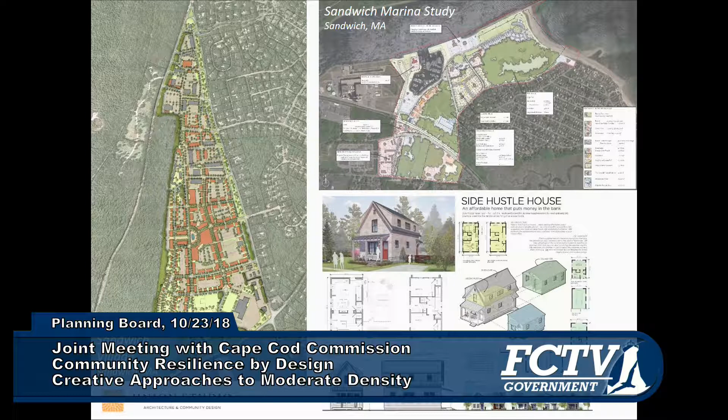Just a couple of examples on the left, South Sandwich Village, a newly proposed mixed-use community we worked on several years ago. Top right, the Sandwich Marina study, working with the town of Sandwich and Mass Development on a vision plan for the marina area. The lower right corner was a competition by the Cape Cod Young Professionals Group to design workforce housing—a little cottage side hustle house we proposed.

We also have a number of built projects or projects in the works on the Cape. Top left, Heritage Sands, a cottage community in Dennisport, Massachusetts. Top right, Brewster's Landing, a 40B project with affordable and market rate housing in Brewster, Massachusetts. And on the bottom, Sea Captain's Row in Hyannis, which will be workforce housing.

So again, we aren't Cape based, but we certainly spend a lot of time out on the Cape and are glad to continue doing so.

As a quick outline for tonight, first I'll recap our first presentation—let me get a show of hands of who was here for that. Okay, that's helpful, so I won't belabor it. I won't redo the first presentation entirely, but I want to recap the major issues so you understand what we were trying to achieve. Tonight is the second presentation, where we're presenting the proposed strategies and results of the efforts we've been doing for the last few months.

I'll talk about the input we got in the first public sessions. We also had an online visual preference survey, which got something like 450 responses, so I'll share that input too. We'll talk through the proposed building types, which is really the core of our deliverable, and then go through a few illustrative case studies showing how those building types could be applied in the various communities we've been working with. We'll conclude with next steps and some time for discussion, though I know you have a full agenda tonight.

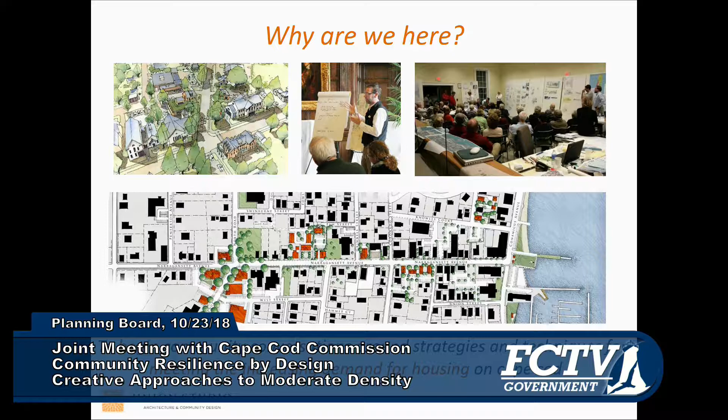So a quick recap of the first public presentation: why are we here? We wanted to start a series of community conversations around the need for addressing the housing crisis on the Cape. In particular, we wanted to make sure we were getting input from the community—we didn't want to show up with our own lens or ideas without talking to the community to figure out appropriate strategies that would actually belong and fit in and enhance the communities we're working within.

In terms of our process and schedule, we began back in May with preliminary work. Our first public presentations were in June. We ended up doing an online visual preference survey in July and August, giving ourselves more time to make it the best survey it could be. We presented at the One Cape Summit in August, sharing our process and preliminary thoughts. And here we are doing the second public presentations—originally planned for September, but here we are in October. We'll also be doing this in Eastham and Orleans in November.

Our last step is developing a framework for form-based regulation. We'll talk about that a little bit later, but that's our next and final step for our process. But we are also looking to expand and do the same exercise in additional communities. Again, we'll talk more about that later as well.

As I mentioned, we're starting with three communities: Falmouth, Eastham, and Orleans. Why those three? Well, those are three communities that have recently gone through studies that identified places where some new moderate density housing types might be appropriate. In fact, two of the three also have undergone recent zoning changes, not Falmouth but the other two, that try to promote more of these moderate density housing typologies.

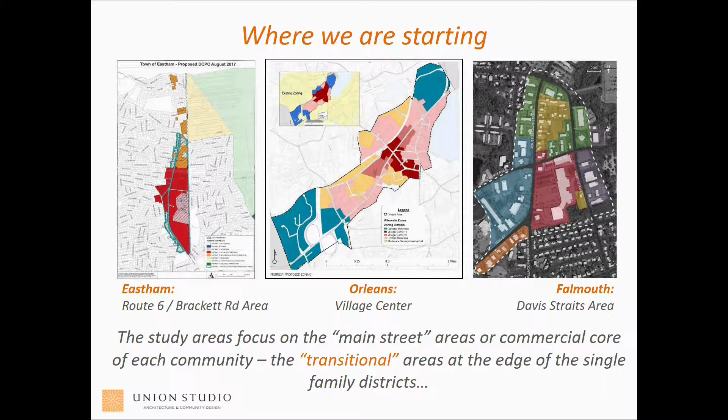These are primarily main streets with commercial uses along them. But just outside of the lines, just past that line of higher intensity commercial use, you pretty much immediately get into a single-family residential adjacency. There's nothing that really transitions from that more intensive use to that less intensive use. So all three of these areas shared that same set of challenges and opportunities.

So what are we hoping to deliver? First and foremost are a number of moderate density housing prototypes - that's what we'll be talking about here tonight. As I mentioned, we're also going to develop these into a form-based regulation framework. And we intend to share our findings both through the One Cape Summit and also these presentations with the public.

The key takeaways are that population is growing, about 6,000 more people by 2025, which by the way is only a few years away. Housing prices and rents are increasing at a much higher rate than owner and renter incomes, so the cost of living is getting exponentially more challenging. And the majority of the housing stock on Cape Cod is single-family homes, 82% - extremely high. Most of the nation that number's usually around 60%. So what that suggests is if your lifestyle doesn't need a single-family house, you have a very difficult time finding something that will meet your housing need, and there's not a lot of diversity of housing choice.

So what does this begin to suggest? If we want to resolve some of these challenges of the housing crisis, it's beginning to suggest we might need to consider some sort of density - the dreaded D word, right? But what we're really here to talk about is that not all density is the same. There might be various options that might feel more appropriate for the communities we're talking about here.

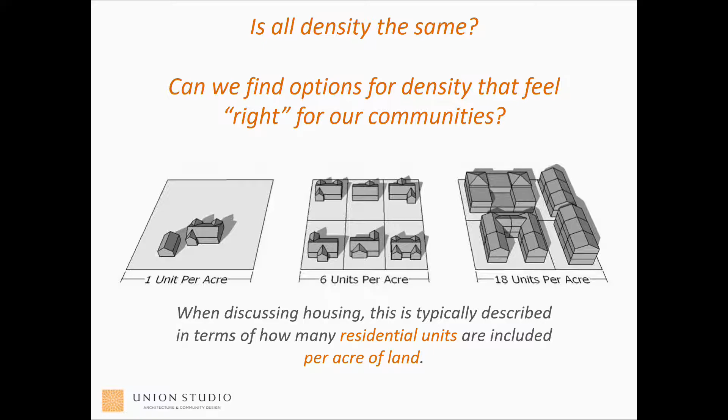Most of you probably know, but when we're talking about density, at the most basic level it's a mathematical exercise of how many units are within a single acre of land. So if you have one house on one acre, that's one unit to the acre, all the way up to the example on the right, let's say there's 18 units in that same acre of land, that's 18 units to the acre. So density at its core is really a simple mathematical equation, but it's really so much more than that.

We shared this example of a project we had in East Greenwich, Rhode Island, where on the left you have what the by-right zoning was looking for, which was multifamily housing, and that building had 15 units in it on three-quarters of an acre of land.

But what you can begin to see from around the edges is it wasn't really appropriate for that specific context. You've got a single family house on either side of it across the street. This is right at the transition off of Main Street, so it was the appropriate location to have some sort of transitional density. But that form is something that got most folks sort of upset if you were to come in and propose that.

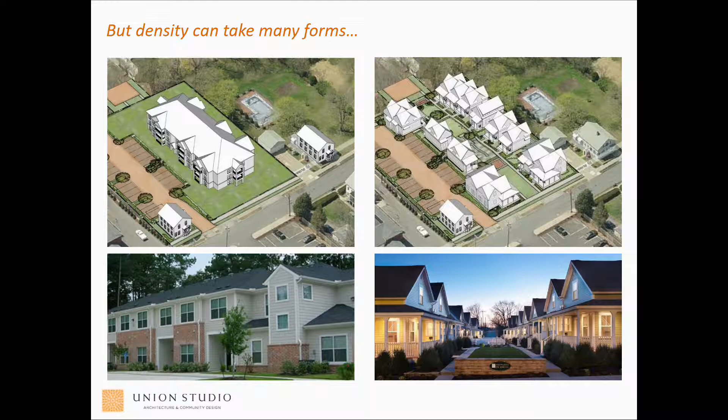So what we proposed and built instead is what you see on the right. We took that same number of units, broke it down into a number of cottages. So again, you have 15 cottages on 3/4 of an acre, so that's 20 units to the acre. Again, from a mathematical standpoint, that sounds very high, but you can see from the image down below, the character of that and the scale of that was something that felt more appropriate to that single-family residential context.

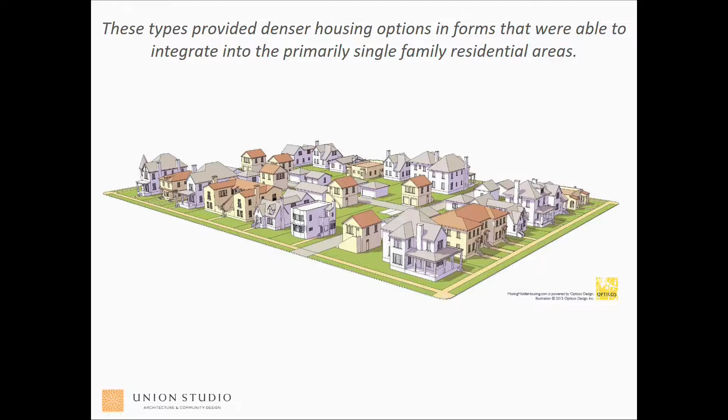On the Cape, our context that we talked about, it's going from single family directly to commercial, right? So the right-hand side of this, think of that as a commercial property. So what are those things that might slot in between those as a transitional solution? So these types were common pre-1940s. They provided higher density types that could plug in pretty neatly into a single family sort of context. So you can see here the colored ones are the moderate density types slotted in between the single family homes, and they fit. You squint your eye as you walk by, you would never pick up on it.

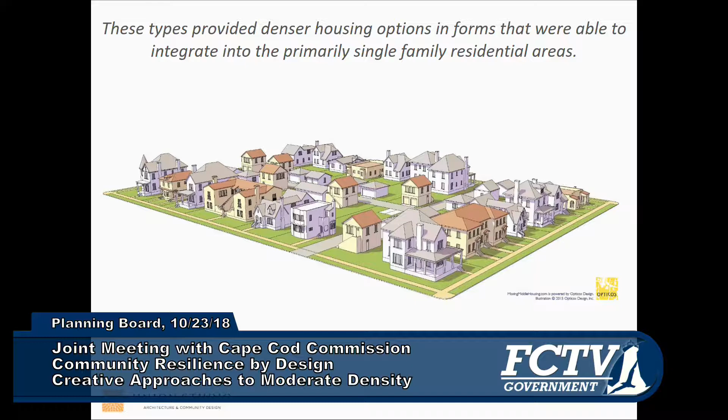Why is the missing middle missing? A number of reasons, but primarily we're zoning ordinances coming out of World War II. We tried to simplify zoning down to a couple of very simple categories: single-family housing, multifamily housing, retail, right? So we split everything up, and as a result, we kind of left this big gap of all these great options. As a result, the financing structures followed suit, and because we haven't done these things for 60 years, we also find there's usually a lot of localized resistance to these higher density types, higher than single-family. So there's a renewed interest now because they slot in nicely in historic cores, which is where a lot of either empty nesters or millennials, it's funny, they're all looking for the same stuff.

They want to be in these kind of happening historic cores where there's a limited amount of land. So these are good solutions for getting a couple of units in the limited space that's left. They also provide more affordable options. If you can put more units on the same land, obviously you can spread that land cost out, so it's an affordable housing alternative.

The industry in general is looking for smaller increments. The big 400-unit project that takes 10 years, people are less interested in trying to do that. The banks don't want to finance it. The developers are worried about how long they've got their neck stuck out on it. So everybody is looking for a smaller increment of development, and these help do that.

Generally speaking, I think people are beginning to appreciate this notion of finding a home that's the right size. Home sizes have been ballooning for 50, 60 years, and these are alternatives where they are right size, the correct size for a number of people's lifestyles, not everyone's.

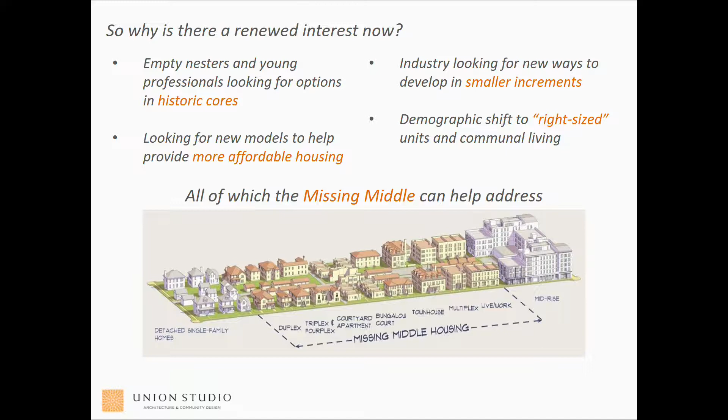So what do we mean by building types? This is where we introduce this idea that when we talk about building type, it's a way of categorizing housing types that have a similar disposition. So for instance, you probably all can picture a cottage, right? That's a very small scale single family home. When 2 single families are attached, it's a duplex; a series of them attached is a townhouse. Most people are pretty aware of those.

A couple of the other types we talked about: stacked flats, which is really like a couple of small apartments that are connected but still in a relatively small form. Townhouse over flat is this idea that you could have a single multi-story unit over a flat below. And the last one is a multiplex, which is really a very small multifamily building, say only 10 to 12 units, not a large multifamily complex that might have 60, 70 units in a single building. So these were the initial types we shared in the first presentation.

We went through each of these, which I'm not going to do, and we talked about some of the particular characteristics of that type. We would show some examples that we found on the Cape that helped us calibrate what the usual density was for their application currently on the Cape. We showed some precedent images because not all of those were necessarily wonderful to look at in their current form. A lot of them were built in the 60s, and so they look a little tired.

And in the lower right, we did what we call a visual preference, where we showed 2 images and we talked with folks that were at the first presentation about which one of these feels more appropriate. We had some really good conversations around issues of style and scale, and I'll relay those results in a moment.

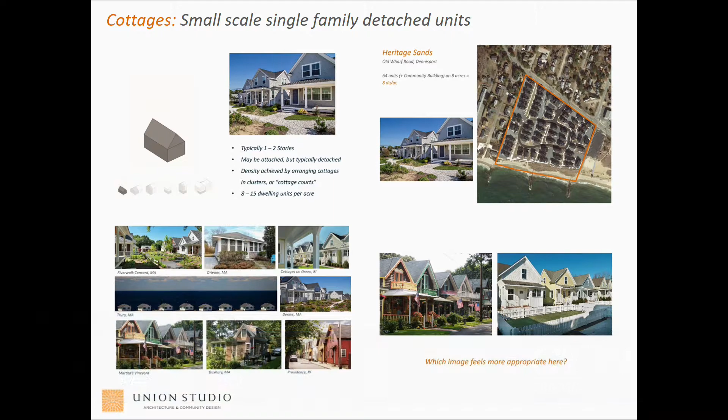We talked a little bit about form-based codes, which I won't go into great detail here, but the notion of a form-based regulation is an alternate form of zoning, where zoning currently is generally more about sort of metrics, dimensional issues, and uses. And the idea with a form-based code is to say, well, I'm less concerned about what the use is in there as long as the building is of a certain disposition that would fit into the existing context.

So say you're on a street that's largely 3-story grand single-family houses. If you're proposing something new there, maybe it's more important that it looks like it fits as a single-family house, even if it's actually a Starbucks with 3 units above it. So it's another way of thinking about zoning that tries to get more to the core of the character of the building and less about the use or the particular metrics that might be typically associated with it. So that's a big, complicated topic, probably its own lecture, but that's as much as we'll talk about it tonight.

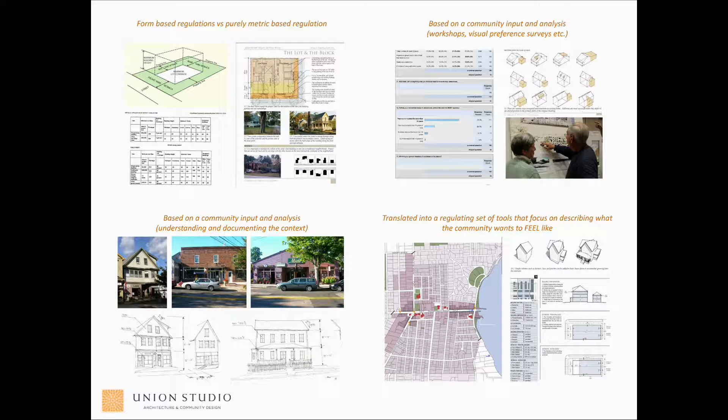So we concluded the first one saying, circling back, really our ultimate question was, in each of these specific contexts, in Falmouth, Orleans, and Eastham, could any or all of these options fit into your community? So that's where we sort of left off in the last one. We had conversations around that.

And so to transition into the input from those first presentations, these were the takeaways we took from the conversations we had at that first presentation. So when talking about style, generally speaking, the folks we were talking to in Falmouth trended towards more traditional looking architecture. Folks in Eastham trended towards more contemporary looking architecture. And folks in Orleans were pretty flexible.

The Orleans area is actually a fairly sizable area, so I think they were of the mindset that there's probably a corner in here that works for any particular style. Similarly with scale, participants in Falmouth were generally more accepting of larger scale structures in the Davis Straits area. If it was right up on Davis Straits, maybe 4 stories would be acceptable. The inverse of that, Eastham folks were very nervous when you got over about 2 stories in height. So the existing context there is much lower, so that makes some sense.

Folks in Orleans were relatively flexible when it came to scale. It was more a question of, well, it depends where you are. If you're right on the main drag, something larger probably makes sense. When you're getting out to the edges where it's transitioning back to single family, that's when we'd expect something lower scale. We agree with that notion in all 3 of these locations. By the end of that conversation, generally folks were in agreement that density really is more a matter of having good design, contextual design that fits, more so than the literal numerical density.

The other issue was style. We took a similar approach - a sliding scale, but instead of shortest to tallest, we were talking about more traditional versus more contemporary in terms of the flavor of the building, again thinking of it in terms of single-family, townhouse, and multifamily types. In the scale one, we showed those together so you could intuitively see we were trying to give you a sliding scale. In this one, we scrambled these all over the place so people couldn't pick up on that, because we thought that might be better for getting an unbiased response.

As a reminder, in our first meetings, what we heard was Falmouth leans more traditional, Eastham leans more contemporary. So let's see what this told us. Right off the bat, when we were looking at the smallest scale, obviously you guys can recognize that's Martha's Vineyard up there - folks in Eastham love Martha's Vineyard style stuff, right?

In Falmouth, we actually get a bit of a split vote, which I thought was interesting, and I'm guessing that's because it's so obviously Martha's Vineyard that you might say, this isn't Martha's Vineyard, this is Falmouth. So I'm guessing that's a little bit of what that's about.

When you get to this next level, which is really a very simply detailed traditional sort of architecture, this is kind of what we live and breathe at our practice. But you can see that's generally a pretty good fit. Most people are pretty comfortable with something that looks very much like a Cape-style architecture.

As we got a little bit more contemporary, this is the one place that it did support that idea. You can see in Eastham, they were actually pretty supportive of this, what I'd call a transitional style - sort of traditional forms, but with a little more contemporary detailing. Falmouth was really starting to lean away from that, Orleans somewhere in the middle. So again, this is really supporting those initial conversations we had.

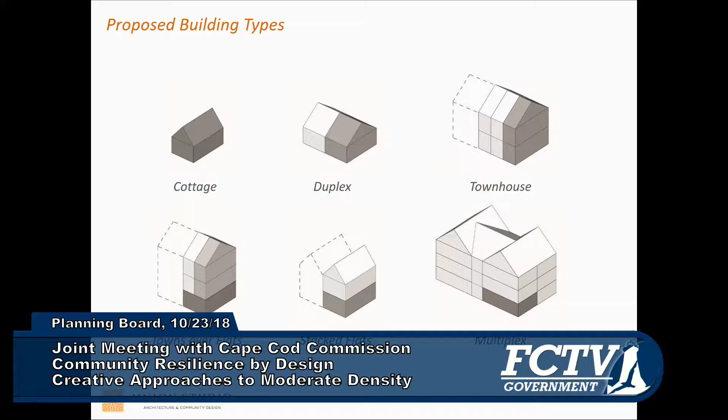You'll recall we talked about the cottage, duplex, townhouse, town over flat, stacked flats, and multiplex when we came in at first. These are the types that we've actually developed and wanted to talk about tonight. Across the top you can see cottage, duplex, townhouse, as we were discussing. When we got into the larger density types, we had slightly different thoughts. They were related, but slightly different.

For instance, that notion of a town over flat, where it was maybe a 2-story unit over a 1-story unit, we began to realize, well, what's to keep you from doing this as a 2-story building with just 1 unit over 1 unit, and calling that a double-decker? I know that's a term—I think in Boston they talk about double-deckers, or they might call them two-families. There's triple-deckers when you stack 3 units, but those are harder to do now with code.

So we decided to relabel that as a double-decker because we thought it was more intuitive. What we were calling stacked flats, we began to realize wasn't particularly descriptive—pretty much any apartment building is a bunch of flat units stacked. What we realized we were really trying to get after was a building form that really looked like a large single-family house. That's what was important, and the fact that there's 4 to 6 units in it is a little bit less important. It's more about getting across that message so it could slot into a number of contexts. So we decided to call that a manor house.

And last but not least, the 10 to 12 unit multifamily building—again, a smaller multifamily building. Multiplex sounded a little too much like a movie theater, so we thought we'd call those walk-ups, since that's another term people have some familiarity with. If you're in Providence, a small apartment building, people would say, 'oh, I live in a walk-up.' It suggests you go up a flight of steps in your home—maybe there's an elevator, maybe not. But again, we were just trying to find terminology to describe these 6 variations we wanted to propose.

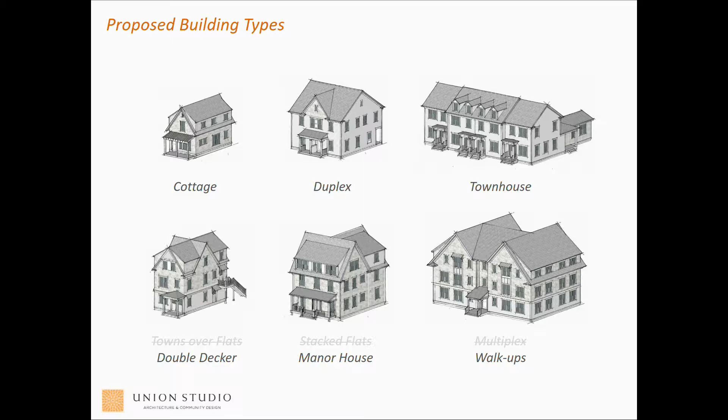To go through each of these, I'll try to go through relatively quickly—we don't want to take all night. The cottage is typically 1 to 2 stories. They may be attached, which is to say you can put two cottages together and make a duplex, or you can put more together, but typically they're independent. The density on these is really achieved by clustering them.

I'll show you what we mean by that. Putting one of these on a 1-acre lot, obviously you're not getting any higher density—it's still 1 unit to the acre. So it's the fact that these are a small enough increment in scale that you can cluster them. What we mean by clustering is, as you can see here, this is our Heritage Sands project in Dennisport. You can see the cottages are clustered around a little green space. They each have their own shared driveway, but they each have their own space. This is how you get the density—by compacting these together. Notice there's a road that comes through, but not every unit is coming off the road, so you can really start to compact these together.

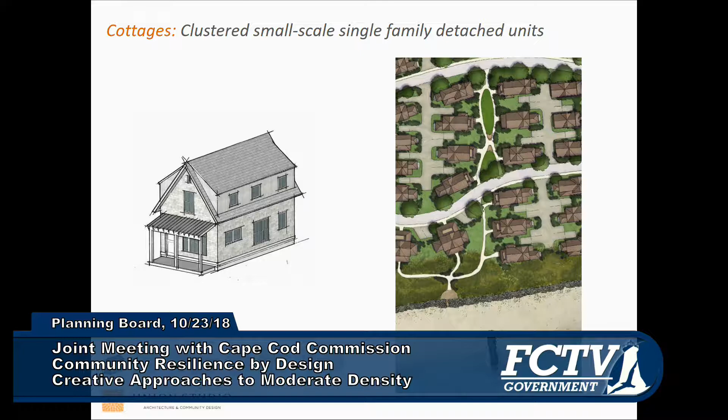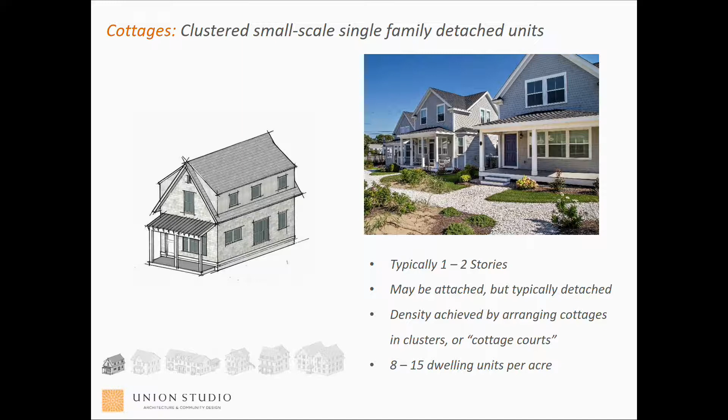The examples we found on the Cape are usually in that 8 to 15 dwelling units per acre range. The example I showed you in East Greenwich was 20 units to the acre—that's probably about the upper limit of where those can comfortably go.

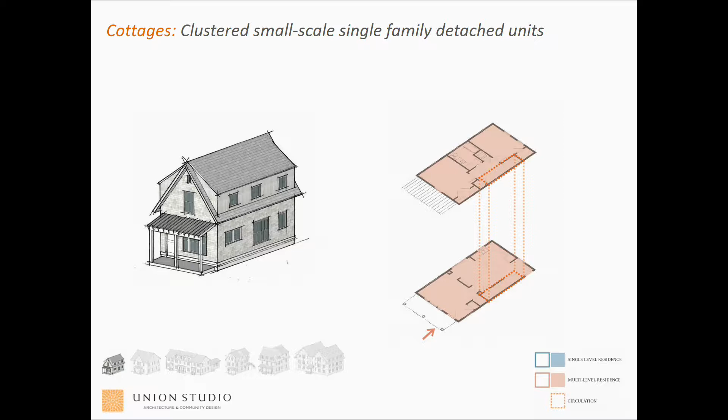In terms of a plan diagram, this is pretty straightforward on a cottage, but we did these for each of the types—a 2-story, single-family unit, pretty straightforward. For all of these, we wanted to show that there's various ways these could look or be configured. With a cottage it was pretty straightforward, but we wanted to show these could come in a number of different styles.

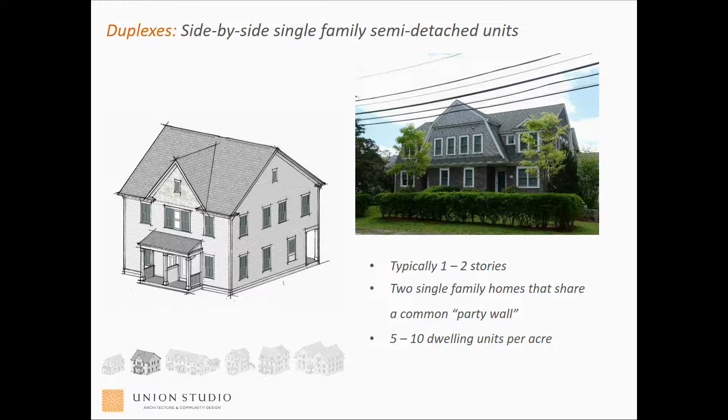The next one was the duplex. A duplex is a side-by-side arrangement—single-family units that are attached, or what we call semi-detached, sharing a central party wall. On the Cape, these were typically 1 to 2 stories, though you could certainly get to 2.5 stories if you had a bonus room up in that attic level. The examples we found of duplexes were generally in the 5 to 10 units per acre range.

The plan diagram is pretty straightforward: 2 units attached by a party wall in the middle. This starts to show the notion of varying looks or scales for different contexts—maybe 1.5 stories on top all the way down to 2 stories below. The one at the top really looks like 2 cottages put together; you'd know those are 2 separate units. Whereas going down, especially on the bottom one where one unit actually enters the side, it begins to camouflage itself, almost like a single-family house, even though it's 2 units.

This shows it could be a variety of different styles. We bias these towards the more traditional, slightly less traditional, but not contemporary, based on the results we heard from the visual preference survey.

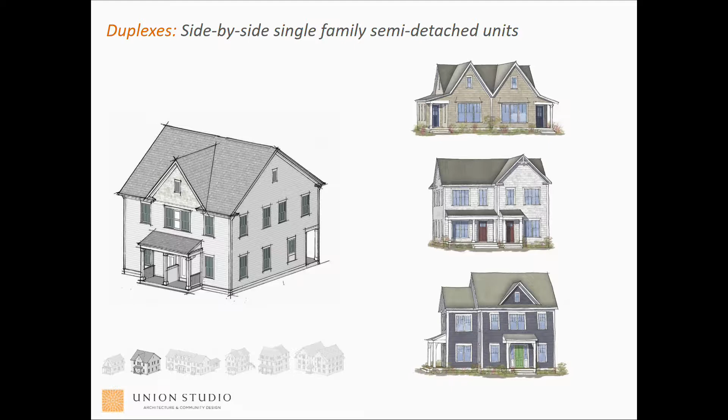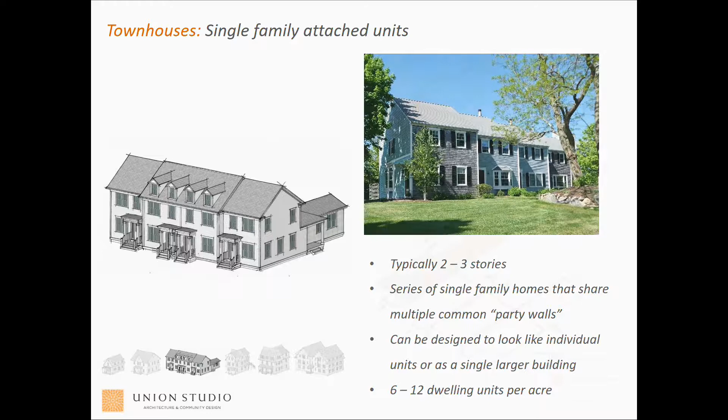6 to 12 units to the acre is what we found on the Cape. I think you can understand what that looks like diagrammatically—a single unit attached to multiple units. You could attach these ad infinitum; you could make a 20-unit long building. But on the Cape, you'd find yourself stretching it if you went over 4, maybe 5 of these attached together.

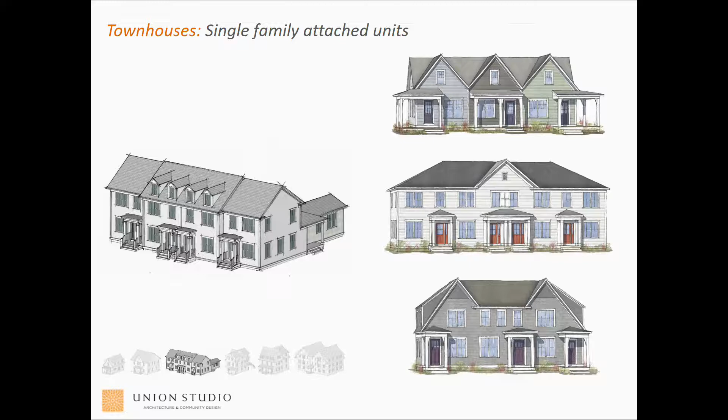In terms of looks, we're trying to show a range anywhere from 1.5 up to 2 or even 2.5 stories. At the top, the idea of 3 individual units put together—you really see those as 3 units—versus maybe the one in the middle, which reads as a single building composition. No right or wrong answer, it depends on the setting.

Next is the double decker—that example that's quite literally around the corner over here. In this instance, we're showing it as a 1-story flat below. See the 2 doors? You could either walk into the lower unit, or go in the second door and go upstairs to a 2-story unit above.

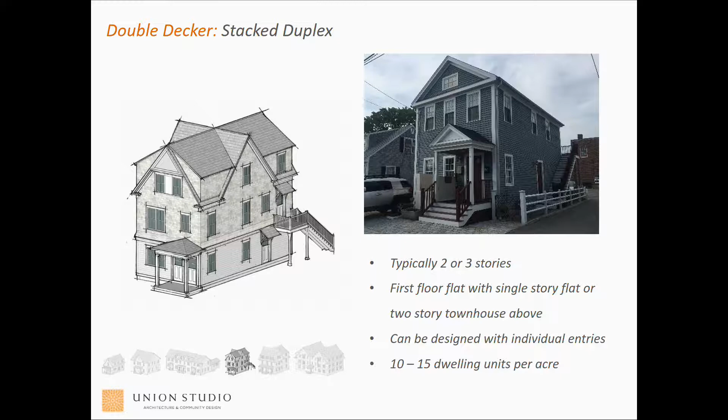Or the example on the right, where both were flats. There was a front door for the lower unit, and you could go up the stair in the back to get into the upper unit—each with its own ground floor entry access.

Diagrammatically, we're showing the notion of a single-story unit with a single multi-story unit above it. In terms of configurations, there's the 2-story version for flat over flat, and the 3-story version we just discussed—maybe it's rotated, maybe combined. It doesn't have to be a standalone building; there could be a series of these attached together. Some are a little more contemporary, so again, it's less about style—you could dress these things any number of ways.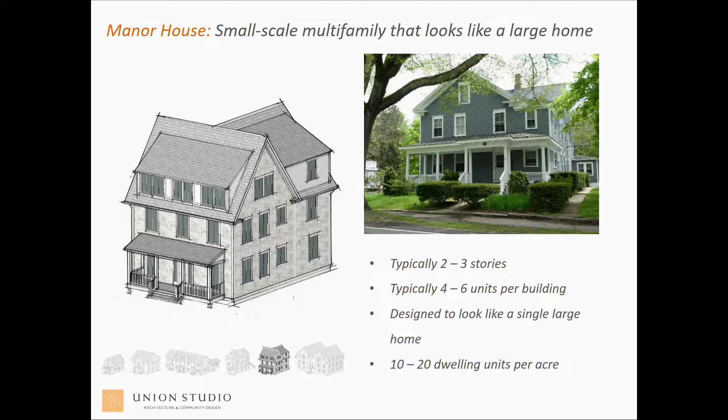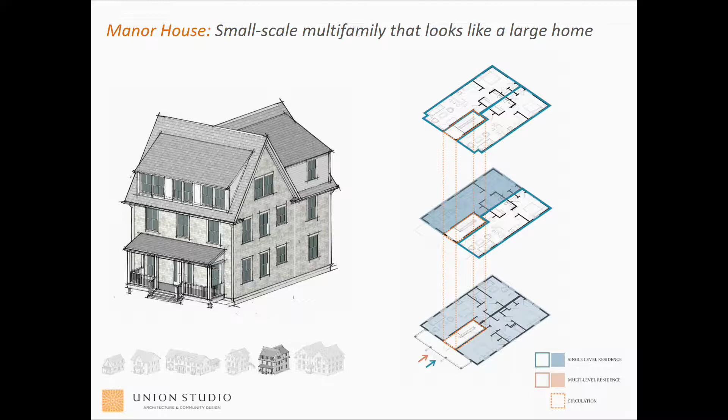In terms of a diagram for this particular one, it's shown with 6 units. There's a shared central stair, and you get 2 units on each of the 3 floors, so 6 total units in the plan view. Here it's shown as maybe only 3 of them stacked on the left.

Last but not least, the walk-up, a mid-scale multifamily building with a single circulation core. Typically 2 to 3 stories, typically 8 to 12 units per building. The building code has a provision where you can do 4 units on a floor, up to 3 floors, with a single stair. Once you go past those limitations, you need a second stair. So there's an economic equation where 12 units is the obvious, reasonable, feasible financial limit for what these want to be.

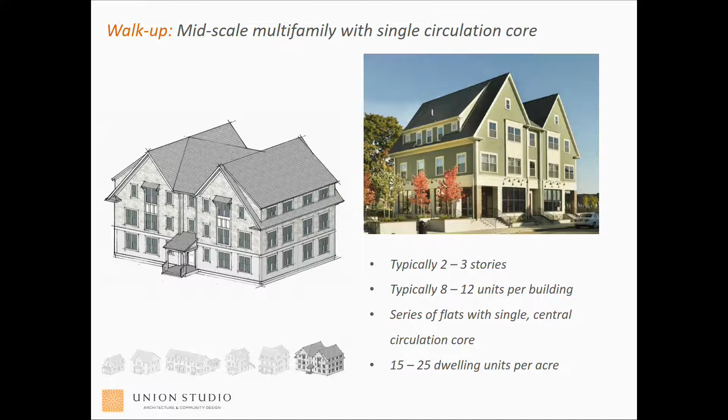But this is getting to be a big enough scaled building that you're not mistaking it for a single family house. These are getting upwards of 15 to 25 units to the acre. In a plan diagram, here you have the ground floor with 4 units on that floor, and with 3 floors total, this one is showing 12 units.

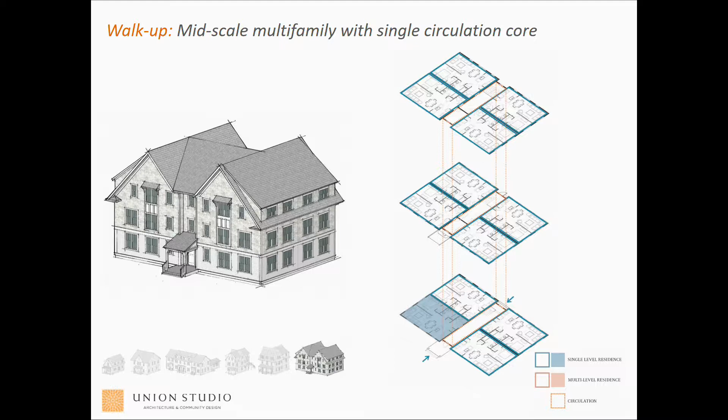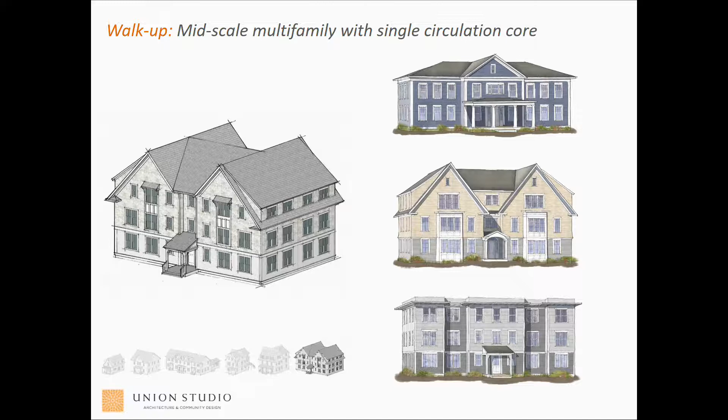Depending on how many stories there are and how you configure them, it could be 2 stories, 2.5 stories, 3 stories, a flat roof, a pitched roof — any number of configurations. These are all shown very symmetrical, but who's to say you don't break it up and do something funky and interesting if that made sense for the context you're working within.

So those were the building types, and we thought it would also be helpful to show how they might be applied to the different study areas we've been talking about. We'll start with Falmouth. In the Davis Straits area, we decided to capture a little corner of the shopping center — Staples, Friendly's, and Starbucks — as a good example. You can see this transition going from very large format commercial at Staples to single-story Cape Cod ranches right across the property line, so there's zero transition there from almost your most intensive to your least intensive uses.

So we took a handful of the types we've been talking about and came up with a conceptual layout. Maybe you have a potential 3-story mixed-use structure, a little commercial on the ground floor but largely residential, as it transitions back to Davis Straits or the continuation of the shopping center. Then as you make your way into the site, we'd start to transition down to walk-ups — maybe a 2-story walk-up to help step down the scale — and maybe a couple of double-deckers and manor houses to get a bit more density.

But by the time we're down to the edge, immediately adjacent to the single family homes, we show these as duplexes or maybe a string of 3 townhouses. So the intensity, the size of the footprint, the number of units, and the height of the buildings can all go down, slowly making that transition back down. But even still, this combined layout achieves 20 units to the acre — that's 52 units with about 5,000 square feet of retail.

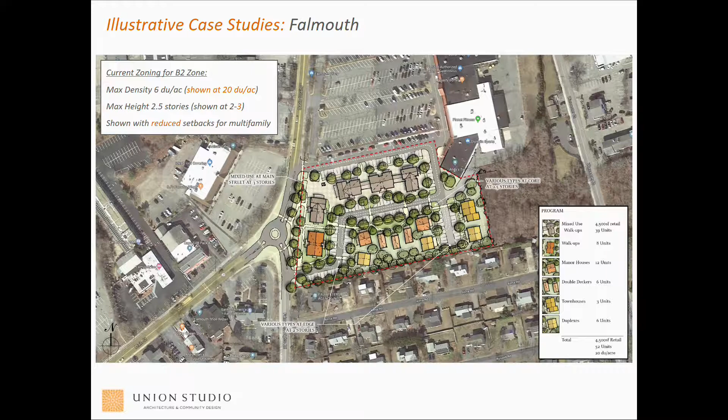So here's what that could look like three-dimensionally. To orient you, this is Davis Straits down here, and this is where you turn into the parking area. The sea of parking still exists, but we've created our own nice little edge here of mixed-use buildings.

Maybe there's a little plaza space. Don't worry, we still have Starbucks and Friendly's on the ground floor of these. You can see the notion of transitioning from a sort of 3-story scale, maybe down to 2 stories, or as you come through here, 3 down to about 2.5, down to 2 before you get to the 1-story scale.

By using a mix of types, we're able to get what we think are reasonable adjacencies, but still get the density up, because we put the higher density ones out at the front where they're not right up against the single family. And honestly, wouldn't you feel weird if you lived in a duplex right on Davis Straits?

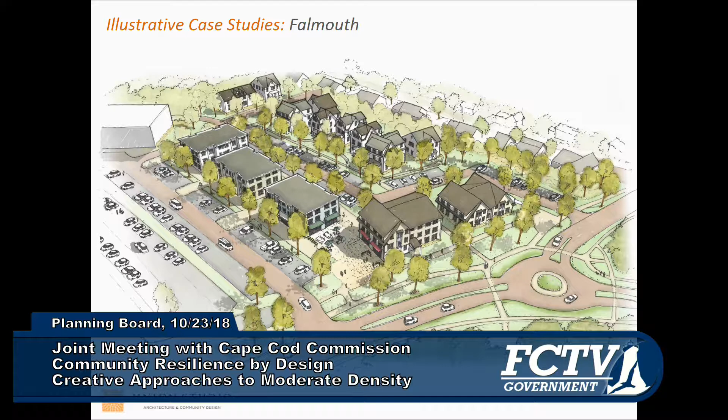So you've got to find the right solution for each of the varying conditions on the site. We also showed a rotary in that location because we know that's being considered.

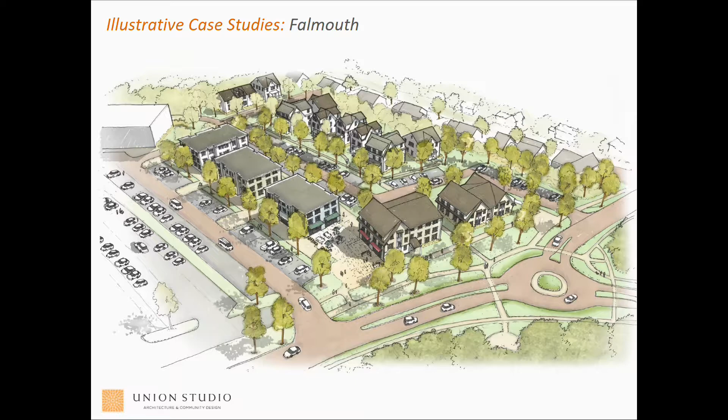That was the most controversial thing in the whole talk so far. All right, so maybe not a rotary. We'll see. So we did the same thing in the other 2 areas as well.

And what Eastham is searching for, Eastham doesn't have what you guys have, right? You have this vibrant commercial core. Everybody, it's an identifiable center. People like to come walk there. Eastham's missing out on that.

So they really wanted to try to envision how do we begin to create sort of that Main Street feel, an actual identifiable center in Eastham. The biggest challenge being that Route 6 is basically a 4-lane highway as it goes through the middle of there. That's another challenge they need to solve.

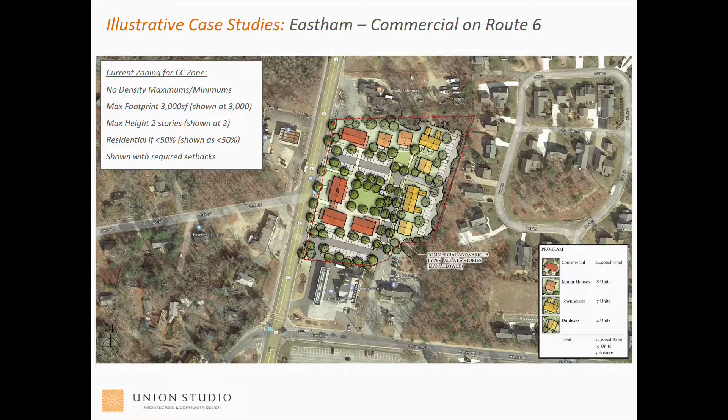They allow a maximum footprint of 3,000 square feet for each individual footprint, with just a little connector between them. But really their zoning is more interested in the scale of the buildings - maximum height of 2 stories, we stuck to that. In this commercial area, they allow residential, but only if it's an accessory use, meaning less than 50% of either the area or the building.

So if you have a single building, you could do the 2nd floor residential, the 1st floor commercial - that would be 50%. Or on the lot itself, you could do half residential, half commercial. That's what we did in this first diagram, shown with all the required setbacks. This meets their existing zoning and their new zoning. We were able to get 19 units and 24,000 square feet of retail, assuming those commercial buildings are 2 stories, maybe retail on the first, offices up above.

That results in an overall density, if you use the whole site, of only 5 units to the acre. Again, that's because it would be more fair to say on the half of the lot that's residential, you're more like 10 units to the acre. But what we wanted to do here was look at it a couple of ways.

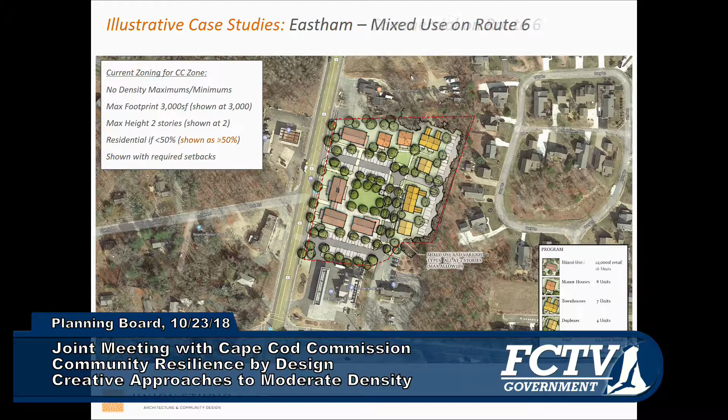First we looked at it just commercial along Route 6, as their code sort of suggests. What we think makes more sense - did you see that? The buildings changed color. So in this instance, now they're mixed use buildings, with commercial on the ground floor because that's the activity they're trying to generate.

But what our real issue is here is housing - that's what we're here talking about tonight. So maybe there's residential units above. Just by converting the second floor units to residential, now we're up to 35 units, achieving more like 10 units to the acre across the site. The one rule we've broken is now we're greater than 50% residential, because we're 50% in the buildings and 50% of the lots. That's not the way their zoning is currently written or intended.

Just because we wanted to see what it would yield, we converted those front buildings to entirely residential, getting rid of the commercial, to let us compare it to some of the other sites. Now we're up to 51 units on this site, a density of about 14 units to the acre. Remember, the Falmouth example we showed was 20. This one's down to 14, in large part because we stepped down the scale - we're only going up to 2 stories in this case.

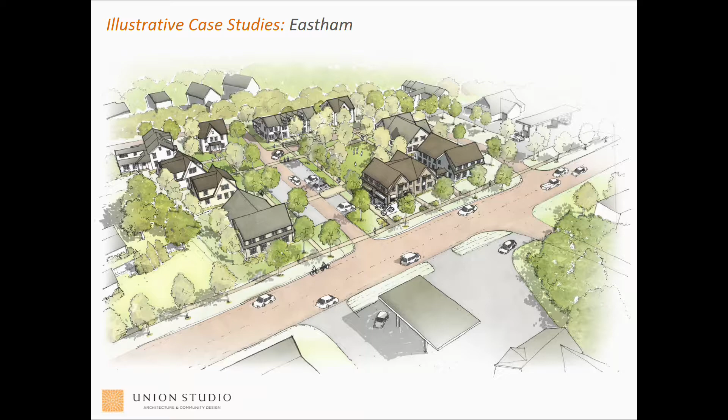So this is the rendering of what that could look like. This is Route 6 going through here. You can see these mixed-use buildings are only at 2 stories in scale, stepping down into some 2-story manor houses, down to duplexes and townhouses - again everything at 2 stories, but blending in nicely and connecting back down to the surrounding communities. Last but not least, Orleans.

The site we identified, you can kind of see the circle there, at the northern reach of their core area. There's this large Governor Prence's Inn, which is kind of an old motel you drive up to and park at - it's probably seen better days. It's probably lived a fruitful life, but it's probably time to move on.

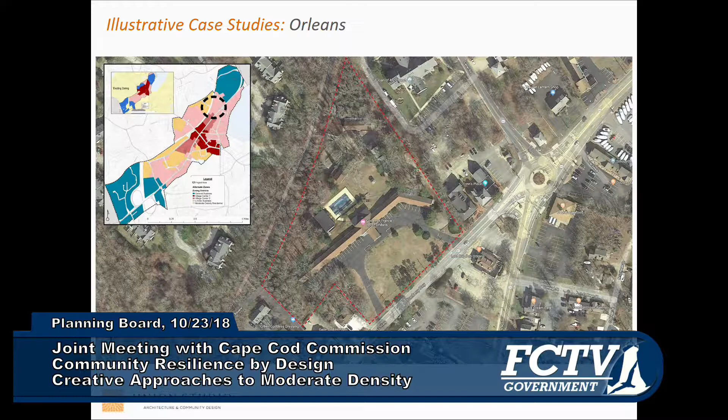In this one, what we wanted to test was looking at some of the lower density types so we could really show the full spectrum of all the types we were proposing. When you're out on the main drag, we did show a single mixed-use building, but then already began to transition maybe even to some residential types out on Old Kings Highway. A lot of the commercial stuff out there now looks like it probably was a single-family home at one point that probably converted into an insurance office or whatever the case might be.

As we went further in, we transitioned down to some townhouses and manor houses. This was the first time where, in our back corners, we began to show cottage courts, little clusters of single-family cottages. The result is 10 units to the acre on this site, 52 units total, ranging from 1.5 to 2.5 stories. There was a little less pressure here in terms of scale, and at the back of the site, instead of single family, you get the rail trail, across from an existing townhouse community. So this one could have supported more density than some of the others, but we were trying to show a range of different options and opportunities.

Orleans has also recently rewritten their zoning. They allow 10 units to the acre, which is what this is, and they have density bonuses that get you up to 14 if some number of units are deeded affordable or are smaller than what's typically built. So if you wanted to get a little bit higher, you can.

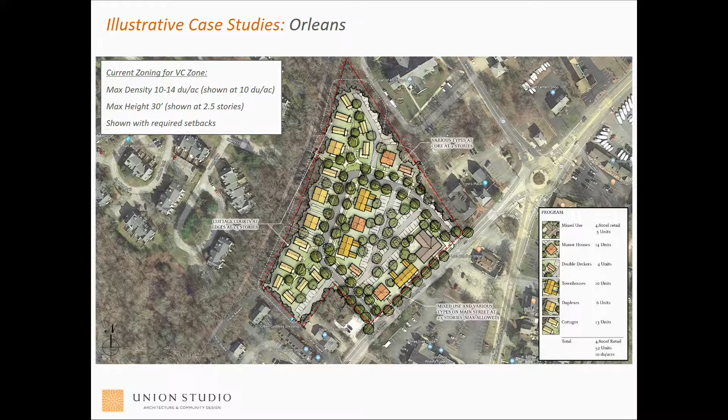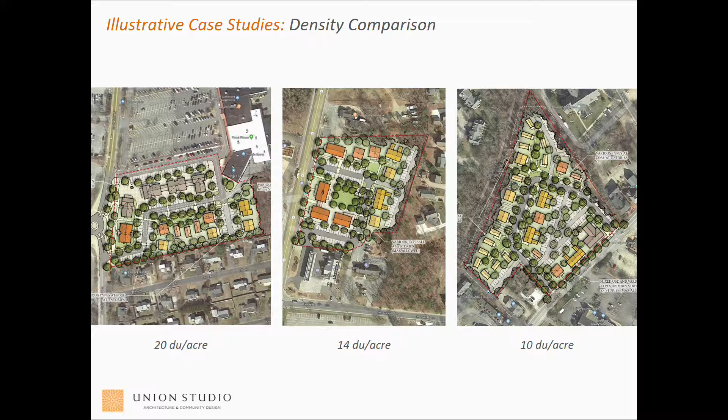So I think that's it. Next steps—you want to talk to this? Sure.

We offered a lot of details, but the detail really is important. We're planning for community, planning for people, planning for the future of Falmouth in this case. It's really an evolution of a multi-year planning process you've been involved in for Davis Straits.

What will come from this are three different things. We'll continue working with Union Studio, with Tom and Corey, and the town planners from Eastham and Orleans to develop a form-based framework, taking the forms you saw today and placing them in a form-based code approach you could apply in your own community—taking the transition from conventional zoning and using this work to evolve toward a different form of zoning that results in the type of community you desire over the long haul.

We'll be convening a developers roundtable. We haven't talked about cost at all here. There's an expectation that the type of design our communities demand results in a higher cost product, and therefore may require more community investment or subsidy to make that happen. So we want to get an idea of what it really takes to build the type of development proposed here, and we'll convene a developers roundtable to get at that.

One of the things we'd like to do is take the forms that were developed—we have a 3D model for Cape Cod. We can take these forms, available in 3D, and apply them anywhere on Cape Cod, giving you an idea of what they might look like visually and what some of the community impacts might be across the region.

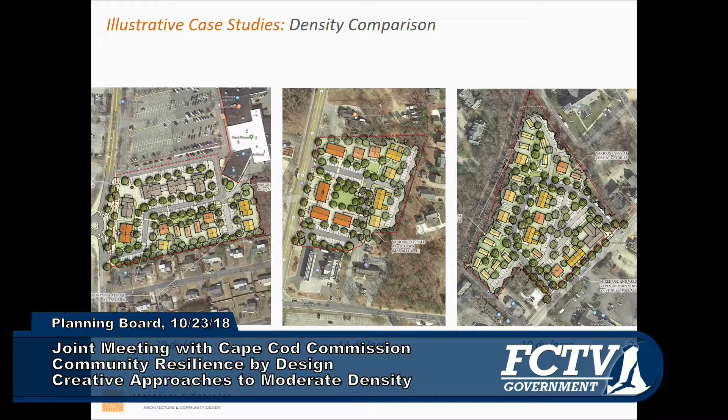Now, the other comment is that I love that green spot, the central green that people could use there. Is there any way that conceptually that could be fit in when you do a little bit more tweaking for Falmouth? We could, although I'd say this one we showed sort of a centralized green, and this one, believe it or not, we think that retail plaza, especially in three dimensions, has a fair amount of space in there, and we tried to show a little sort of eyebrow green. So that can take many forms, it doesn't always have to be the big lawn.

Yeah, and again, this was also just illustrative, right? I'd love if we got a call from whoever owns this property saying let's do it, but that was one of the things we were a little worried about too. These are meant to be illustrative, that's not to say it's happening. But we talked to the town planners about sites that made sense, that people probably wouldn't be too upset about.

So I'm just curious, do communities that you've worked in start with form-based zoning in specific areas, so that you have a traditional type of zoning in some areas and form-based zoning in others, and hope that at some point the form-based takes over the community?

That's often the case. You might identify something like your core area or define some district and do a form-based code for that district. It might not make sense for all of the single-family residential areas to do a form-based code. You could, there's nothing to stop you. There are certainly places that also do a form-based code, where they literally throw out all the old regulations and start from scratch with a form-based code through and through. But I think you could take a couple different approaches depending on what made the most sense here.

So do you do one just for Davis Straits? Do you do one for everything that's your village center? Again, they take many different forms too, that's the other challenge with it. You can really get into the weeds on those if you wanted, or you try not to, but.

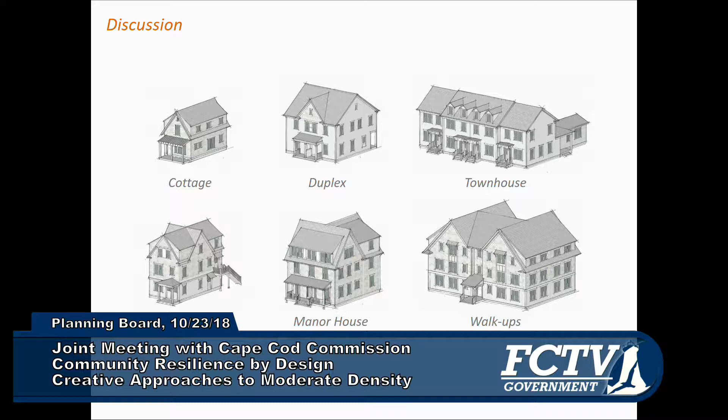The goal was that by giving it a form, giving it something you can look at, at the end of the day you might show these types—what is density? Well, if this was built in your neighborhood, would that scare you? Maybe they'd say, no, this is actually reasonable. If I said we're proposing a multifamily building that's 15 units to the acre, it kind of comes back to what they see versus what they're trying to read in a chart. So the objective of this exercise was really to create something that hopefully educates and informs the public.

I think one thing we need to talk about is how this continues to have life beyond these couple of public presentations. Maybe it's a report, maybe it's something else where we can have the information there, so when it comes up in your community, you can point them to it—hey, go look, Cape Cod Commission's got a great little study on their website that shows what this could be. Or when a developer comes in and shows you business as usual and you're like, this is lousy, you could get the same number of units taking a different approach—go see what these guys are talking about.

Bob: What scares people about density—it'd be fine if everybody just stayed in their unit and never left. It's when they go out onto the street, get in vehicles, and they're on the roads. The Cape is famous for all these dead ends where everybody's got to go out to a main road. I think that's the biggest issue we have to address, and Pat touched on public transportation. These things have to go hand in hand, because if you say we're going to put 50 units on an acre with 50 families living there, people are thinking 50 to 100 vehicles.

Yeah, and not everybody's going to be riding bikes or hopping on the bus. I have yet to work on a project where traffic wasn't a concern. But the benefit here, at least in the areas we've identified, is it's not tucked back in the residential neighborhoods - this is right on the main drags. If you were going to do forms of mass transit, it's going to be on that corridor, so in some ways they could go hand in hand. Transit will go where there is density, too - we've seen that. They're not going to go someplace where there isn't anybody to pick up, but if the density is there, they will eventually move to that area and start transporting people.

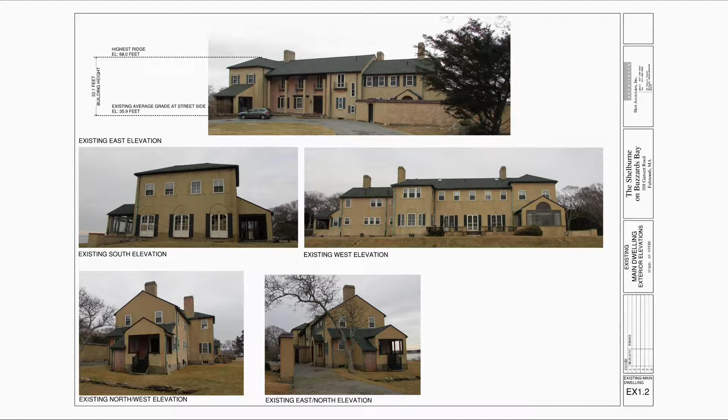This is a very large main house, what I'll be calling the principal structure for purposes of the hearing, and the former is the accessory structure. So both of these dwellings existed prior to 1959. We do have an application before the Zoning Board of Appeals to raze and reconstruct both of these dwellings. We'll show you some pictures of that part of the project just for your information, so you can get a sense of what's happening on this property. But these are both grandfathered - they were used as dwellings prior to 1959, and both will be reconstructed as dwellings.

Laura, I'm confused - it doesn't look like that, you calling this an accessory structure. So are you trying to put an accessory apartment in a - which is primary and which is secondary, and which one do we measure to the size, or are they both? We're really confused by this. I know, and so...

This building, for the purposes of the accessory apartment bylaw, I am calling the accessory structure. Our bylaw doesn't have a definition of accessory dwelling, and it doesn't have a definition of a principal dwelling - we don't have those definitions in our bylaw, but we do have accessory structure and principal structure. So as far as the accessory apartment bylaw goes, there is not a specific path when you have two dwellings on one property. For the purposes of this application, we are applying to construct the accessory apartment within an accessory structure, so for the purposes of comparison of the floor area and the size, we would be using the principal structure, which is the big main house, for those comparison purposes.

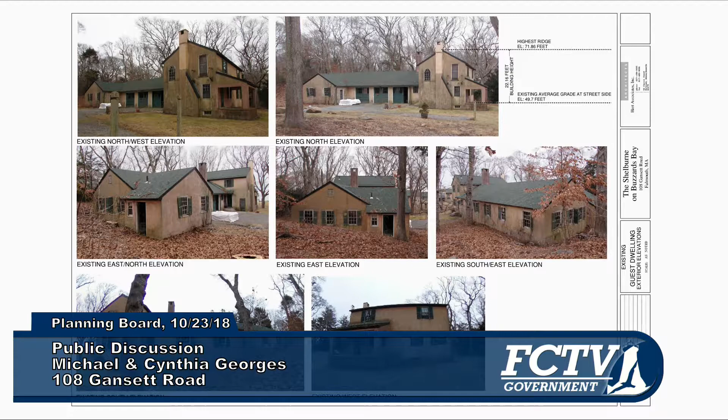It is allowable. If you look at the language of the bylaw, we're still talking about an accessory structure here when you compare it to the principal structure on the property, and the bylaw allows an accessory apartment within the accessory structure. Our bylaw doesn't say you can't have another dwelling in the accessory structure, so that prohibition isn't there. Well, our zoning does, but this is pre-existing. Right, that's why I'm having a hard time. It's a grandfathered use. So that will be a use issue that the Zoning Board of Appeals will have to deal with on the special permit - they'll have to grant a special permit for this accessory apartment as well.

So what we're here for is site plan review. This is not a special permit for the accessory apartment - this is site plan review and design review. We're looking at the design, access, circulation, and landscaping.

The part I don't get is in our accessory apartment bylaw, it says a couple of times about having the architectural effect of a single-family home. How does this work here?

Well, because this will look like a single-family home. So let me show you some of these slides.

This is the existing conditions plan showing what's on the property now. You see what we're calling the accessory structure closest to the street, and then the principal structure closest to the water.

This is the landscape plan showing the layout for the new accessory structure with the accessory apartment, and the landscape architect will talk a little bit more about this. And this is the landscape portion of the plan showing the principal structure as rebuilt.

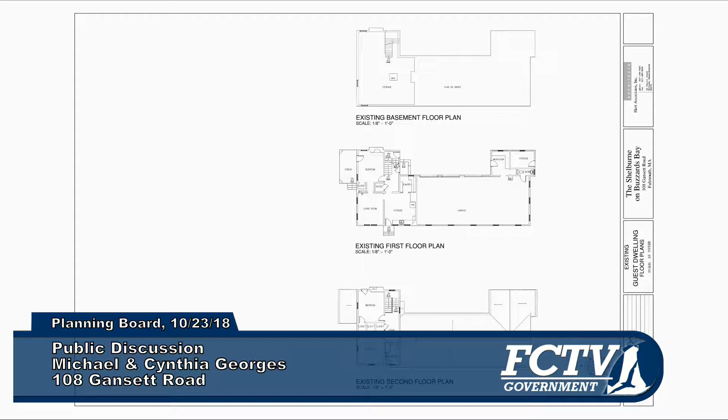These are the floor plans, which are all in your file. This is the existing floor plans for the accessory structure. You have a basement, a first floor with a garage, and a second floor existing right now. So this is the existing dwelling within the accessory structure with a kitchen.

These are the proposed floor plans. You have an unfinished basement, a proposed first floor plan with a garage as well, and then the proposed second floor plan with the lower portion showing the accessory apartment, as well as the rebuilt main dwelling living space.

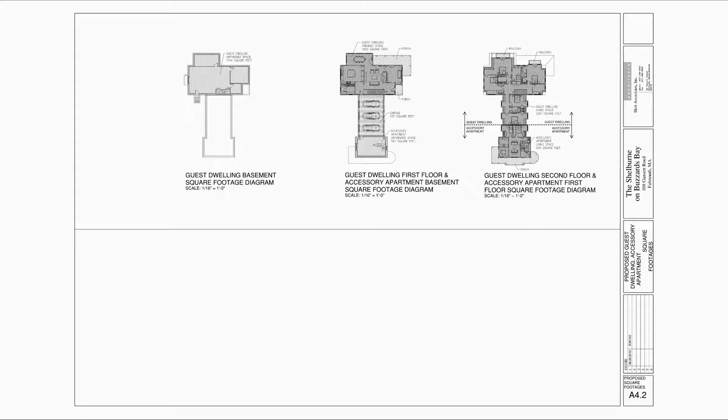This is the plan that's in your file showing the square footage comparison for the living spaces within that accessory structure.

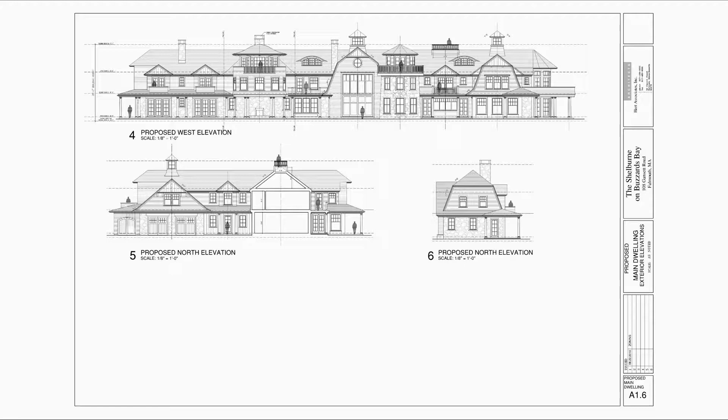And so these are the elevations, just for your information, for the principal structure to be reconstructed. Again, this will require a special permit from the zoning board. So just showing you these for your information, so you can see the design details that have gone into it.

The floor plans, these are in your file as well: first floor plan with the garage, second floor plan, and the attic plan.

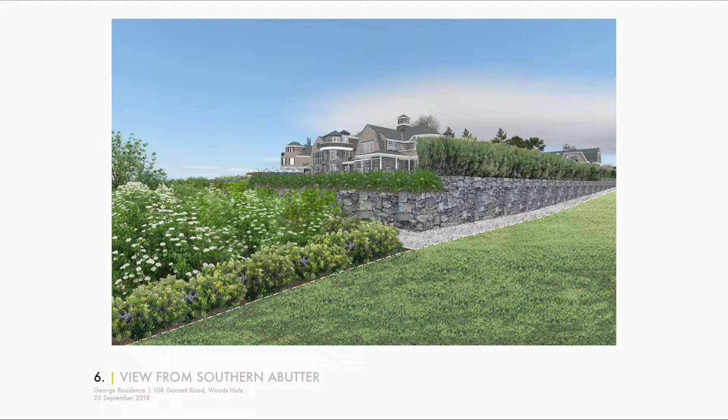And then we have some renderings of the entire estate we included to give you an idea of the vastness of this property and what's going on here. There's a view from the northern abutter, a view from the southern abutter, and over the south lawn and the northwest lawn.

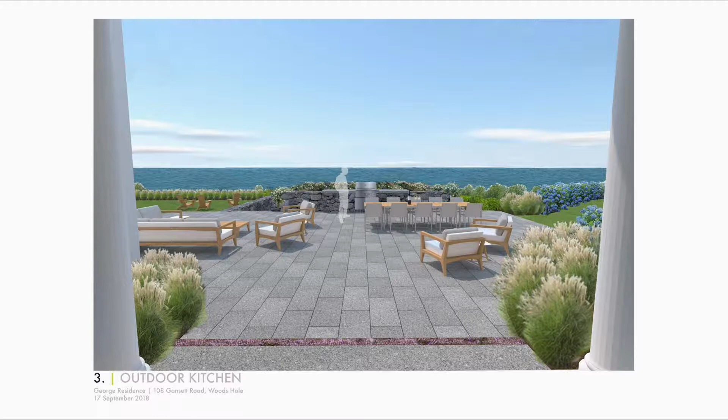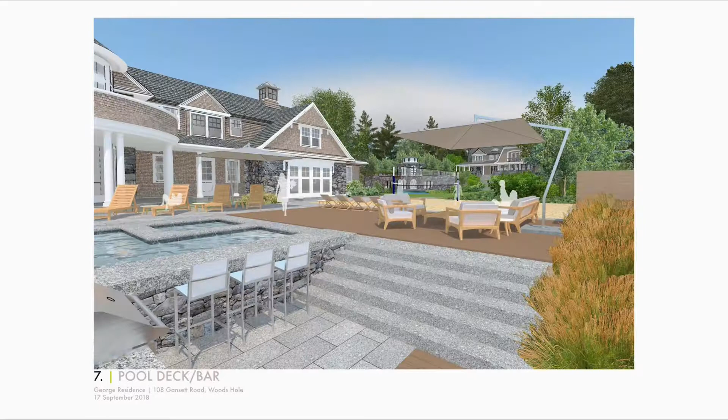And this is an outdoor kitchen, again in the principal structure, the dining area, the infinity wall that's being proposed, the pool, the pool deck bar, and the long view of the ocean.

You'll see the accessory structure in the background as being rebuilt, and this is overlooking the pond. They're calling this the guest house, but this is the view from the accessory structure towards the water.

So the architect is here, and we'll go through some of the design elements on the project. I just want to go through a couple of technical issues.

So under the accessory apartment bylaw, as you know, the planning board is required to take into account the design standards, the requirements and purposes of the accessory apartment bylaw. So you would say, well, how does this fit into the purposes of the accessory apartment bylaw?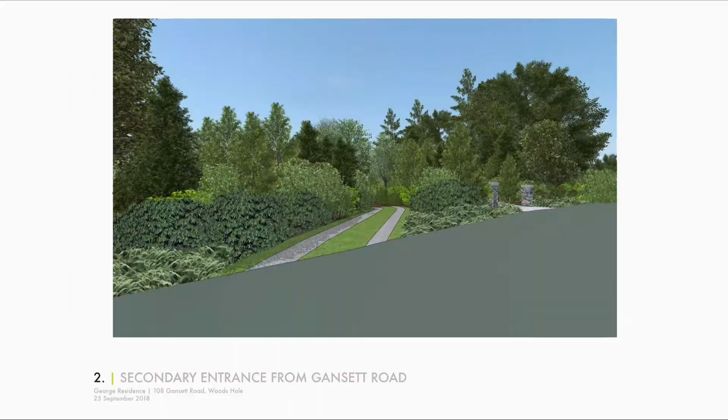The entire building is comprised of the guest quarters as well as the accessory apartment. On the proposed first floor plan, you're seeing 3 car storage bays as well as the main floor plan of the guest quarters. On the second floor, you're seeing primarily several bedrooms and bathrooms that are guest quarters. At the bottom of the page, that is the 800 square foot accessory apartment.

The main entrance is in the lower right-hand corner, directly off the porch that faces Gansett Road. One enters into a small vestibule. There is a living room, a kitchen with an eating area, and two bedrooms and a bathroom.

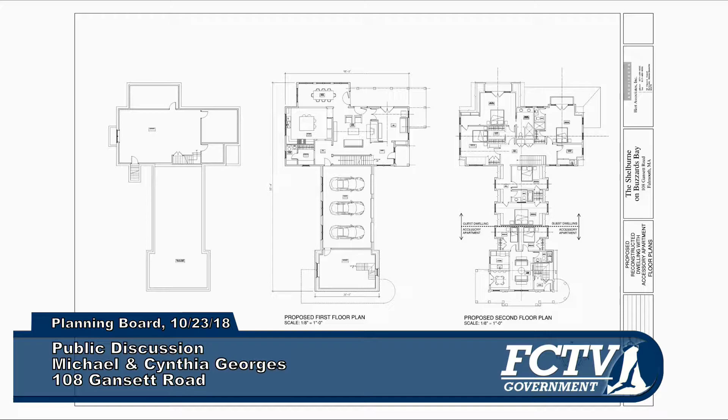Let's go to the proposed site plan. The proposed access is for the informal 2-tire track driveway to enter as a distinct entrance from the main house. The whole purpose there is to allow some privacy, both for the caretaker and the owners, so that dwelling has its own identity and its own presence.

People going on to the main house or the guest house would turn left and park in front of the guest house, or continue on towards the water in the main house. And the parking - there's one parking spot for the accessory apartment, and that's the parking spot that has its own entry, and then there's 3 spots for the guest. So there's no garage included for the 800 square foot, because we would make you count that square footage for the garage as part of that structure, but if it's outside, it's just parking.

Finally getting to understand this. Yeah, good, there's no garage for that. Good.

Before I talk about the architectural style, it's worth mentioning that the proposed project upgrades the entire infrastructure on the site, not just the buildings. Restoration planting, as Laura mentioned, new septic systems employing current technologies, engineered site drainage system, bringing the entire property up to current environmental standards.

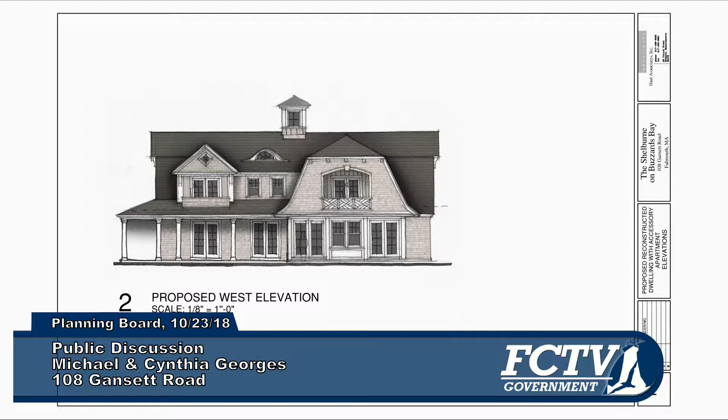The gambrel shape with multiple porches. Let's run through the next slide. So that's the ocean-facing side - what's that, the west side? I'm sorry, yes, there it is. Then back up one, or go forward.

This is the least evident side, the backside, if you will. But then what I wanted to point out is that the caretaker's apartment has, thanks to the grading and thanks to the way the site and the street work, a very low-scale presence on the street.

Is there a second floor in this structure, or is that just attic? The caretaker's apartment is on the second floor. What's on the first floor is garage. So there's no attic - it's a one-story element that's on the upper floor.

I'll be happy to take questions later, but I'm going to turn it over to Jen. When you measured the area for all those rooms, they weren't on a second floor - they're all on a first? They're just the ground, what you walk in the front door, the ground floor from the door walking in. There's no stairwell going up to an additional room? There's a stairwell going down into the basement space.

We calculated the square footage by - because the 2 bedrooms are under the roof, we calculated the 2 dormers, we calculated that whole space, but then the space under the roof, we counted from 5 feet down. That's the biggest problem we're having, is understanding the measurement of these things, and that's what I was trying to get at. So we use the definition of how the square footage is calculated for gross floor area. And whose definition is that? The Falmouth zoning.

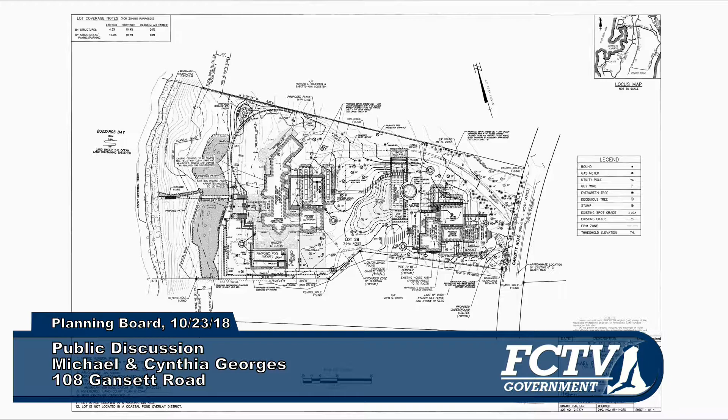Am I going the wrong way? Okay. Sorry.

Here we go. So our focus area this evening, as I said, starting at the high point at Gansett Road at elevation 60, we actually drop a total of 13 feet to the lower parking court of the proposed accessory structure.

We have also done a full inventory of existing canopy trees on site. There's a significant amount of canopy as you move from Gansett Road, and it becomes sparser as you move to the waterfront side of the property. Wherever possible, we're preserving mature trees that are healthy and non-hazardous.

There are some locations where the limits of grading and proposed infrastructure and utility improvements are requiring removal of trees. In those locations, we are proposing a fairly dense planting approach of proposed screening material, which will be a mixture of evergreen and deciduous trees: white oak, arborvitae, American holly, and then we'll also be weaving in layers of understory shrubs consisting of viburnum and rhododendron. The goal is to create a very naturalized planting buffer, which doesn't look too ornamental given the context of Gansett Road and the neighborhood.

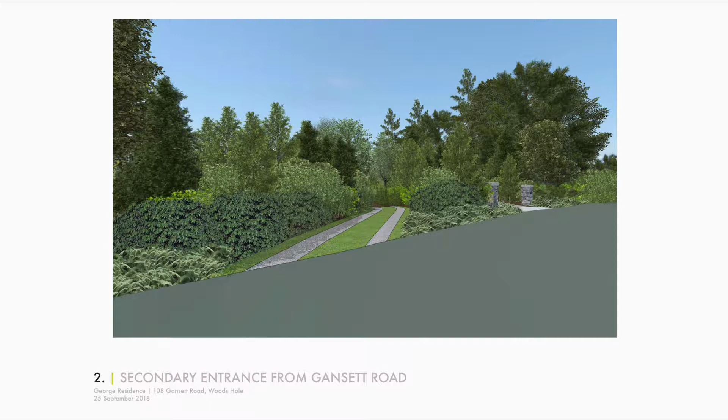And if you'll bear with me again, hopefully I'm going the right direction with these slides. So this is the vantage point from Gansett Road of our proposed entrance to the caretaker's apartment. It is intended solely for use by the caretaker of the property. We have deliberately designed this so that it's subordinate to the main entrance, which will be announced by two stone pillars. We'll probably engrave the address numerals in one of those pillars, so it's clear when you arrive at the property what is the main entrance.

All of the proposed driveways and parking areas will be porous, with the exception of cobble aprons in some locations. We also will be revegetating all of the disturbed areas and slopes with native ground covers, such as hay-scented fern.

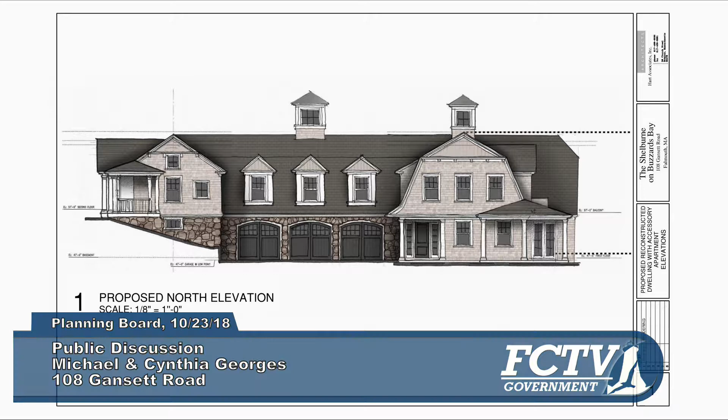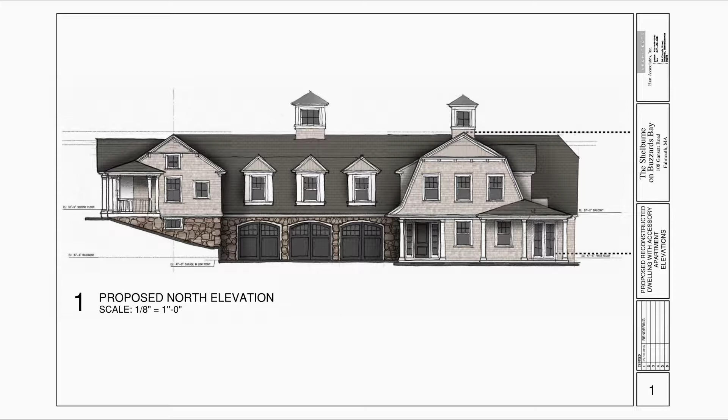So here is a good example. You can see the grade change between the parking court of the garage and the main entrance to the accessory apartment. We are going to have a small staircase between the two, but it's over 10 feet. So that's part of the reason driving the separate entrance to the caretaker's apartment, because their front door, which they will use 90% of the time, is 10 feet higher than the parking court, which will be intended for guests and family to use.

We haven't talked in detail about the other improvements of the property. You've seen some of the images. Clearly it's a complex project. We are proposing significant improvements, and with those improvements comes a responsibility in terms of the investment and commitment to ongoing property care and maintenance.

This is intended to be a legacy property for the George family, so they want to be responsible and plan for the care necessary to maintain an estate such as this. That's why we've integrated, as sensitively as we can to the context and character of the architecture, some discreet amenities which we hope will attract and retain a caretaker who can steward this property, hopefully spanning a couple of generations, so it doesn't fall into disrepair like much of the structures have, unfortunately, that we're proposing to demolish.

So with that, we're happy to answer questions and take comments. Laura, if you have anything.

Thank you, Jen. Mike McGrath is here, and there was a referral from the engineering department that I'd like to ask him to address. I don't know if the board members saw that referral, but there were some comments about the dry wells, and an issue was raised about the sight distance and the access point on that secondary caretaker driveway. I know we've run long and it's getting late, but just a couple minutes to address that with you, if that's okay.

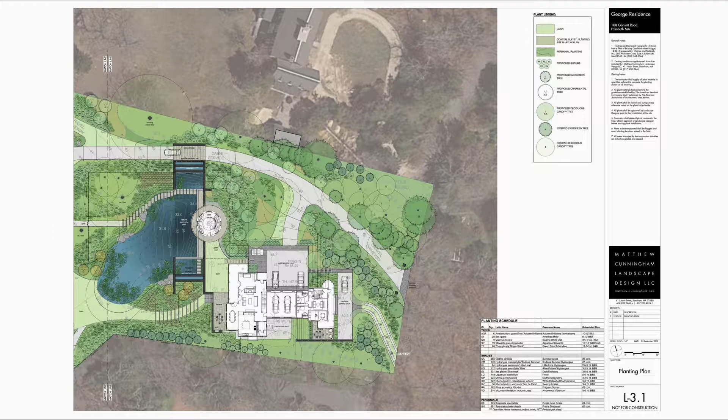I'm not familiar with the term natural pool. So natural swimming pools are, I don't know how long they've been around. It's a pretty interesting phenomenon.

It's a hybrid between a pond and a gunite swimming pool. There typically is some sort of a gunite structure, and then rather than relying on conventional pool equipment for sanitation and filtration, there are designed zones of aquatic plants which provide natural filters. So graphically, this stippling that you see here is to note the areas that would be not open water, but those would be the marsh zones, which would be acting as the natural filters.

Something to note is the natural pool is not necessarily year-round. It won't be used year-round. It will not have a winter cover like a conventional swimming pool would have. It would freeze and look more like a pond.

Is that just natural drainage to feed that pond? No, there will be an irrigation well to supplement, in addition to collecting a lot of the roof water to use as a supplemental backup to keep up with the evaporation rates in the summer months.

And you could swim in it, which was my question. Septic. John, you got any questions down there?

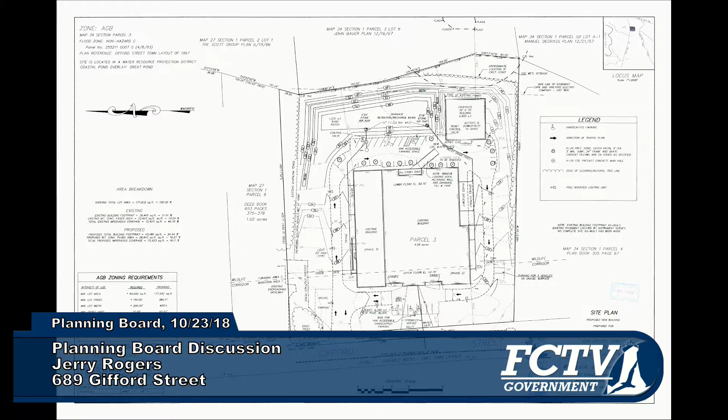I am here proposing a 4,900 square foot footprint, which would be actually 3 floors at the rear of the property at 689 Gifford Street. That area has been designated as a paved area for Budget truck rental. I am finding more of a need for storage than I am for truck rental, and I am looking to take that paved area and put the building on it, so it doesn't upset my lot coverage and so forth.

I've been working with Tom. I believe you have all the updated information regarding the site plan, which was just redone by Warwick Associates. The building would be... here it is, in the agricultural zone.

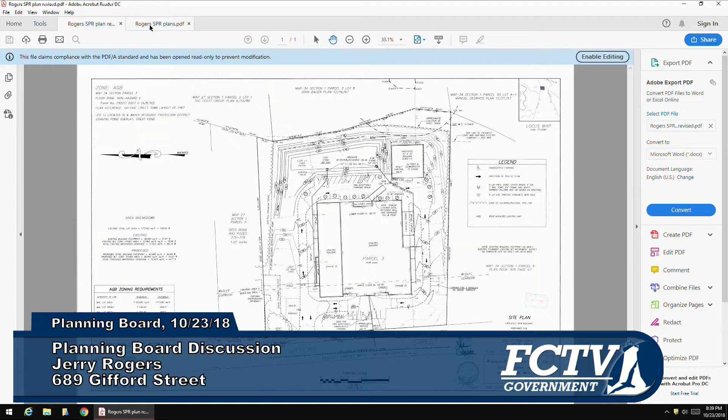Okay. All right, perfect. Okay.

The new building will resemble the existing one in regard to peak height and eave height. It'll be the same color, same design. It is located in the right rear corner of the property, facing the existing building.

After watching the previous two presentations, I feel totally unmanned. So, and I'm a Red Sox fan. Yes, I know.

We've been working with Tom, and we've addressed the drainage calculations. It hasn't been determined exactly how we're going to handle that yet, but I don't know what you've gotten back from engineering regarding that.

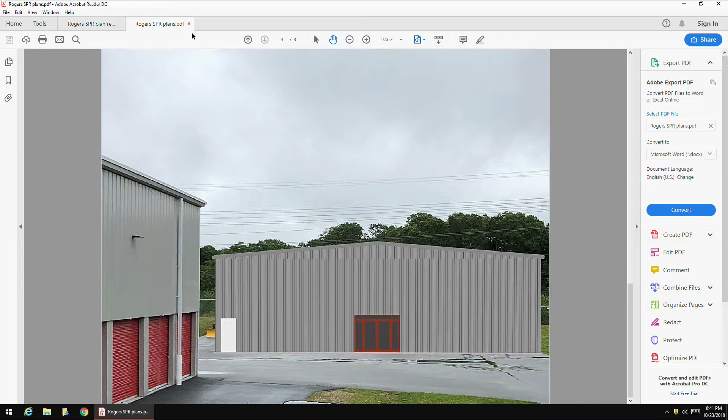There is an issue that was brought up regarding access by the fire department. This here is a loading dock, and the fire department was concerned about getting their bigger trucks around and out, especially through this area. So we decided that we could actually remove that loading dock and pave it. Very honestly, it doesn't get used. All of the big vans that come in now, they lower down, they have ramps that they use, so it's really a moot point to have that there.

I think it's a positive move in regard to the area. The trucks are the trucks - we all know what happens with those: they leak, they bleed, they're parked there and so forth. This is a much cleaner, neater operation in the big scheme of things. It'll cut down a little bit on the traffic in the area.

When the engineer went out, we're addressing a curb cut that was left open. I talked to Lawrence and Lynch, and I have a proposal that they gave me to come and replace that. It's a pretty straightforward project.

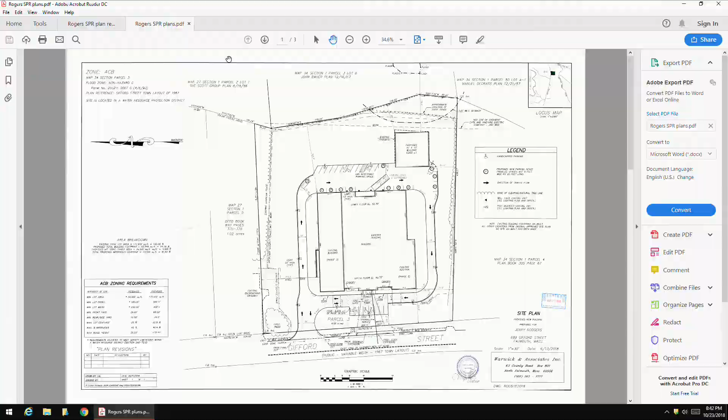There's no change of use or anything of the sort. Tom, is the use an approved use in the AGB zoning district? It is, and it exists there currently. It's already there, so we're not making any non-conformities.

Charlotte, any comments? I'm looking at this memo from Tom, dated this past September 20th, a very recent memo, which noted several conditions from previous site plan approval that don't appear to have been addressed - are these still of concern? Those are the things that Mr. Rogers was just saying they'll be addressing.

When we got the site plan in and we looked at what the site plan was approved, when engineering went out to the site, they didn't see some of those previously approved conditions. So the board in their decision, I'm hoping will say to ensure that the project complies with all previous approvals.

This project originally went to the Cape Cod Commission as a development of regional impact. It came back as approved through that. We've had some conversations with the Cape Cod Commission about whether this change evokes another return to the commission. They said it did not, because it was an incremental change.

So though a couple of the conditions where the sidewalk wasn't carried through, where the curbing was supposed to be replaced, our engineering department went out there and noted where these issues weren't met, and they'll have to be rectified before they get a certificate of occupancy, per our conversations with the building inspector.